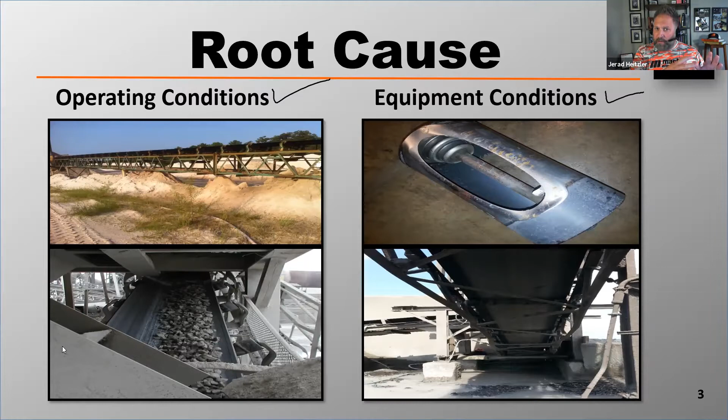There are reasons why a belt will mistrack — it doesn't just mistrack naturally. Typically, there are two categories of root causes: operating conditions or equipment conditions. Operating conditions are things you're doing that are causing the belt to mistrack. Altogether, there's a whole bunch of reasons why the belt can mistrack, and most of you probably have multiple reasons combined — a bit of operating conditions and a bit of equipment conditions. When you throw two or three things into why the belt's mistracking, it can be quite frustrating.

One of the most typical reasons a belt mistracks is the operating condition of carryback. Carryback basically sticks to the return path of the belt after the belt discharges the cargo, and that carryback can build up on return rolls. All rolling components steer the belt and have influence on it — in order for a rolling component to steer the belt correctly, it must be clean.

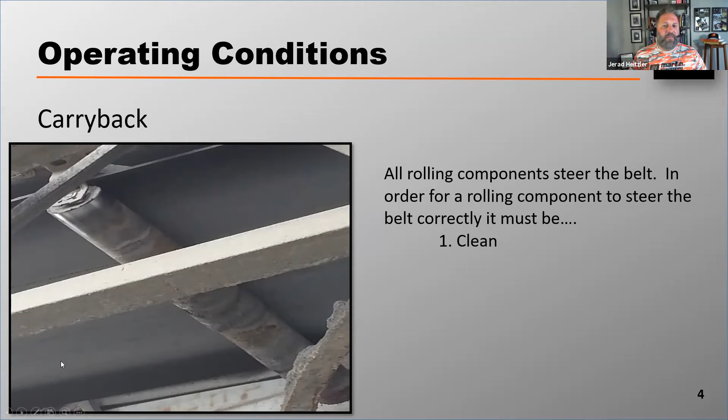When we allow carryback to build up on return rolls, that will cause the belt to start to wander. All rolling components have influence on the belt, and in order for them to guide and steer the belt correctly, they must be clean. So you want to make sure you have belt scrapers installed, that those scrapers are maintained, and that they're tensioned properly. We always recommend a multiple belt cleaning system, consisting of a primary cleaner — typically a urethane blade — and a secondary cleaner, which definitely should be made of tungsten carbide. Bend pulleys, take-up pulleys, carrying idlers, and return rollers all must be clean and can't be built up with material.

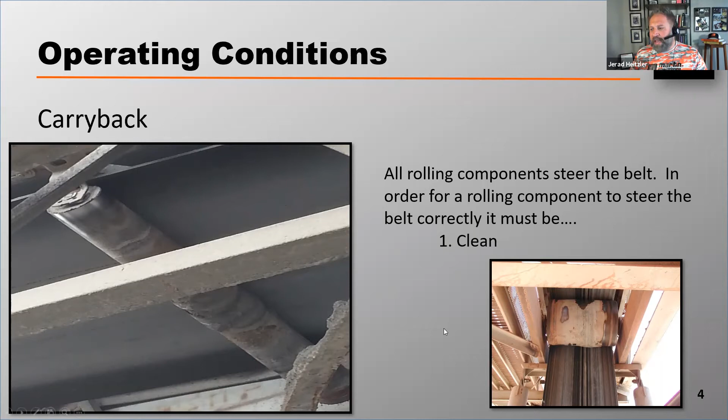Another operating condition, which adds to this wildly important statement, is seized rollers. All rolling components steer the belt, and in order for a rolling component to steer the belt correctly, it must be clean and it must also be rolling. If you've got seized rollers — and this is a clear indication that this roller is seized — if those rolling components are not rolling, that belt will not operate properly. So we've got to make sure those rolling components are clean and rolling.

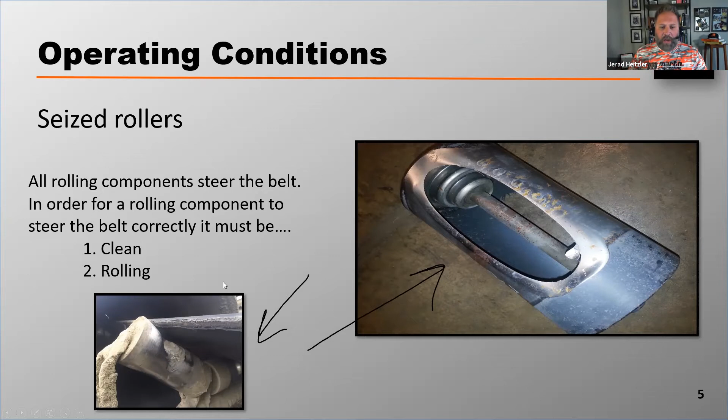A couple of other operating conditions are quite common. There are two types of loading conditions that can cause the belt to mistrack: off-center loading, like you see in picture 1, and the less understandable segregated loading, shown in picture 2. Off-center loading is pretty self-explanatory — you're loading material onto one side of the belt, and that load will push the belt up into the carrying idlers, eventually causing spillage if severe enough.

Segregated load is a little different. It isn't present in every industry, but it's most common in mining. Anytime you're dealing with material straight out of the ground, that material isn't consistent in size until it's run through a couple of different crushers. So that run-of-mine material can have big chunks in it, and it'll also have very fine material in it. As that material with big chunks and small fines is being conveyed, it's being vibrated.

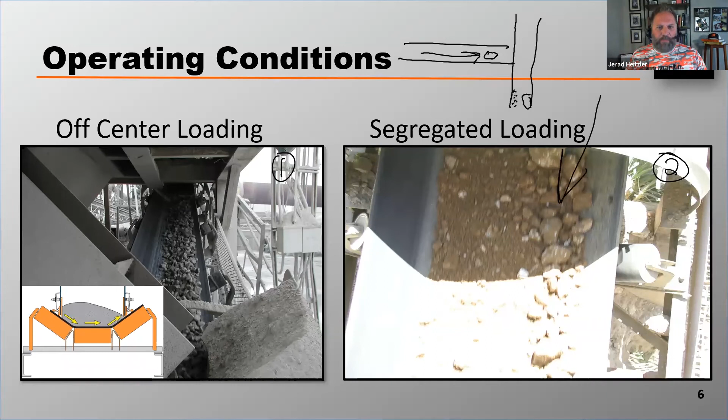That vibration put into the cargo causes the fines to sift to the bottom and the big chunks to migrate to the top. So then you've got a conveyor belt with big chunks on one side or on top and small fines on the bottom, and that conveyor dumps onto another conveyor running at a 90-degree angle. What happens is those big chunks on top of the pile fly out to the outer edge of the belt, while the small fines drop to the other side, just like we see in that photo. That improper distribution of weight can cause the belt to mistrack as well.

Another really underappreciated reason a belt mistracks is that maintenance staff often improperly adjust the dust skirting. What happens is maintenance staff see dust or spillage coming out from underneath the skirt board, and they make adjustments to that skirt board to help with the spillage. When that skirting becomes unevenly adjusted, so one side of the belt has more drag than the other, the side with more drag tends to move a little slower, which can cause belt mistracking as well.